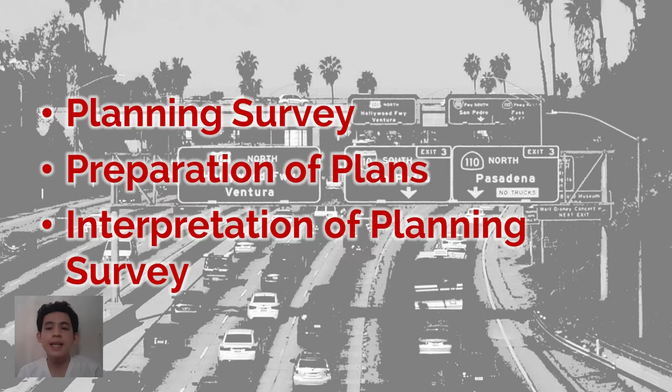Hello everyone, my name is Matthew Havana and we're going to talk about planning survey, preparation of plans, and interpretation of planning surveys. But before anything else, let me share with you this very famous quote by Benjamin Franklin. It says, "If you fail to plan, you are planning to fail." This quote really emphasizes the importance of planning because if you will not formulate a plan, you are more likely

to fail. So na-observe nyo, the most common time frame in highway planning is 5 years. Kasi by creating a 5-year plan, mas na-increase mo yung chances of success in reaching your goals. But also, meron pa ring annual plans just to show progress of the plan each year. Sa 10-year plan naman, it is too long and a lot of things may change in that span of years.

And now let's proceed to planning survey. Highway planning phase includes assessment of road length requirements for an area and preparation of master plan showing the phasing of plan in annual and 5-year plans.

So share ko lang, dito sa municipality namin, the local government unit already gave a notice to us, especially because we are situated beside a national highway, about the plan of widening the road. And also, nag-travel kami dun sa Bislig City last Sunday. Na-observe ko, nakita ko yung mga roads dun is all widened. So, what do you think are considered before conducting these projects? It

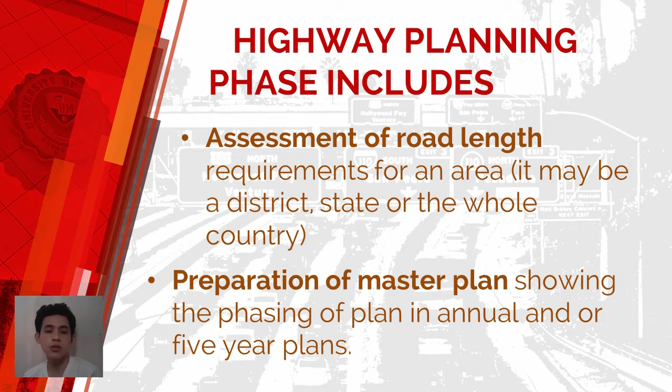obviously involves planning. So, highway planning involves the assessment of the length of road required for a given area, which may be a city, district, state, or a country. It also includes the preparation of master plan for the area taking into consideration future needs and phasing the program in annual or 5-year plans based on the priorities and utility.

For assessing the required road length for the area, field studies are to be carried out to collect the necessary data. These are economic studies, financial studies, traffic or road use studies, and engineering studies. Napakahalaga talaga magkaroon ka ng knowledge about the area where you conduct the project by planning survey with the help of these 4 studies. So, una is the economic studies.

In economic studies, details of the existing facilities, their utility, distribution of the existing population in the area, population growth trends, existing products in agricultural and industrial sectors, future trends of development in these sectors, existing communication and education facilities, and the per capita income are to be collected.

Economic growth has received the strongest priority in all the plans because these roads are good for the flow of our economy and for faster transport of goods. Government will not spend on things that will not profit them, of course. That's why they are more invested in the roads that connect to the center of economy like cities rather than roads in remote areas. So next is financial studies.

In financial studies, various financial aspects such as the sources of funding, estimated revenue from taxes on vehicles, indirect benefits of raising the living standards of the people due to the proposed road network, resources at local level, toll taxes, vehicles, and fines, and the future trends in financial aspects are considered.

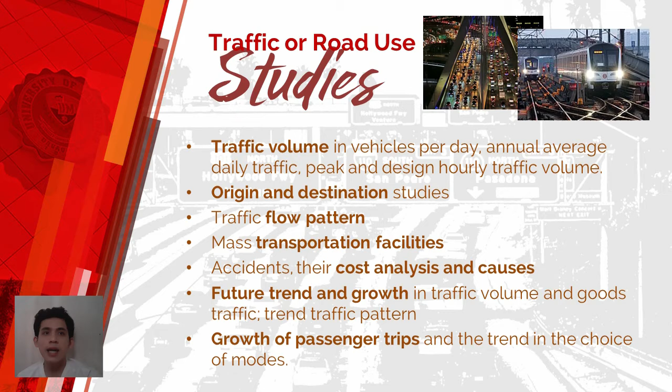So every local government unit considers the faster transportation of goods and other products. That's why, as you can see, they constructed diversion roads for delivery trucks and other vehicles to avoid traffic. Dito naman sa municipality namin, we have an ongoing construction of diversion road. It is mainly for large heavy vehicles and also for travelers to have a faster road.

And lastly, engineering studies. This includes study of the topography, soil, location and classification of existing roads, estimation of possible developments, road life, traffic studies, origin and destination studies, and special problems, if any, relating to construction, drainage, and maintenance. In this study, we are applying the sciences of engineering, yung mga pinag-aralan natin like surveying, soil mechanics, engineering economy, and highway engineering.

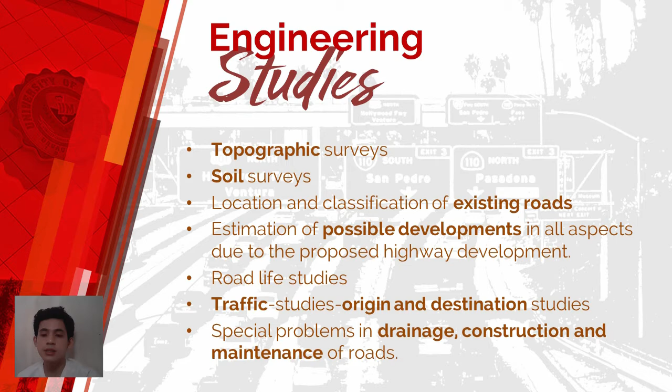We can determine the economical route, estimate the materials and process to be used in construction, and the life expectancy of your road. That's all for planning survey. Remember those 4 studies to be considered: economic studies, financial studies, traffic or road use studies, and engineering studies.

And now let's proceed to preparation of plans. The planning surveys you've conducted based on those 4 studies should be presented in the form of plans, but is conducted before the finalization of alignment and other details of the road development. There are 4 drawings usually prepared showing the various details of the area, and let's see the differences.

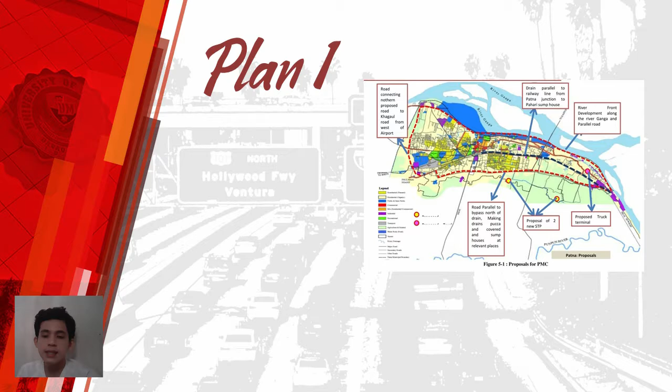First is Plan 1. It is the general area plan showing almost all existing details, namely topography, existing road network and drainage structure, rivers, canals, nullahs, etc. Towns and villages with population, commercial, industrial, or agricultural activities are also shown on this map.

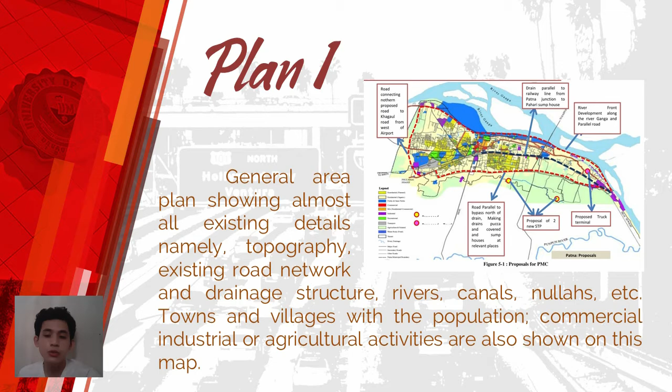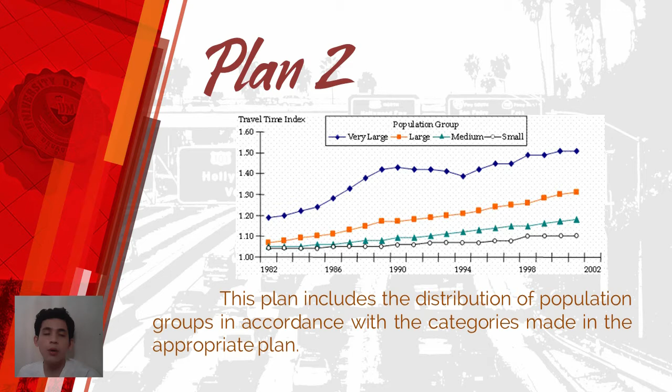Next is Plan 2. This plan includes the distribution of population groups in accordance with the categories made in the appropriate plan. Next is Plan 3. This plan shows the location of places with their respective quantities of productivity.

Lastly, the Plan 4. This plan shows the existing road network with traffic flows and desire lines obtained from origin and destination studies of traffic. Proposals received from different sources may also be shown in this plan.

Now that being said, all these types of planning, not only in engineering but also in other fields, it is imperative to follow thoroughly and fundamentally the step-by-step plan before jumping to others. So this is created with a purpose to succeed.

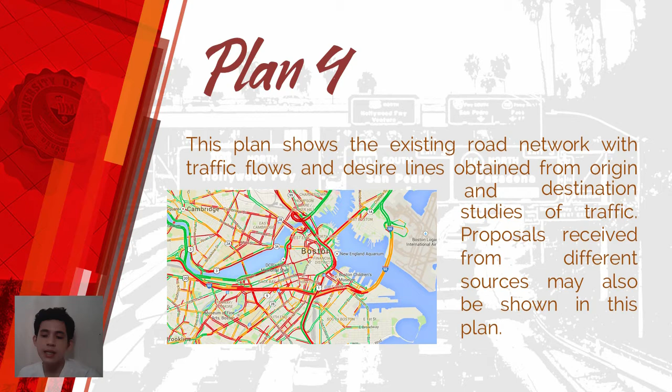So for our last topic, we will discuss interpretation of planning surveys. After conducting planning surveys and preparation of plans, it is useless if you do not understand the details you've gathered. The various details collected from the planning surveys and presented in the form of plans should be interpreted in a scientific way before arriving at the final road development program. The data collected could be interpreted and used for the following important uses.

First is to arrive at the road network out of the several alternate possible systems which has the maximum utility. Next is to fix a priority of the construction projects so as to phase the road development plan of an area in different periods of time, such as 5 years plans and annual plans. As you can see, there is really a need to know the priorities. Maybe there are other projects that have more weight in terms of importance.

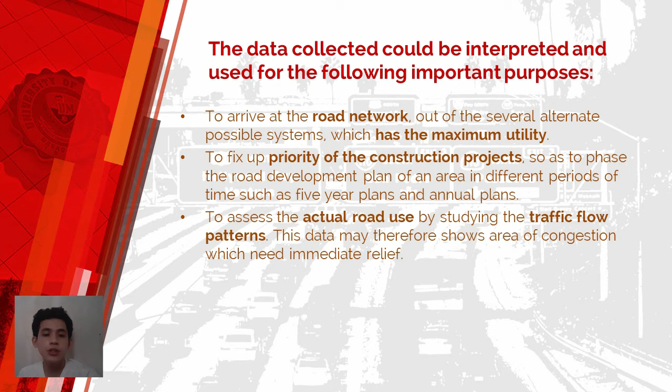Next is to assess the actual road use by using the traffic flow patterns. This data may therefore show areas of congestion which need immediate relief. So if there is a need of widening or constructing a diversion road, so dito.

Next is based on the traffic type and intensity, and the performance of existing types of pavement and cross drainage structure. A new structure may be designed using the data and the past experience.

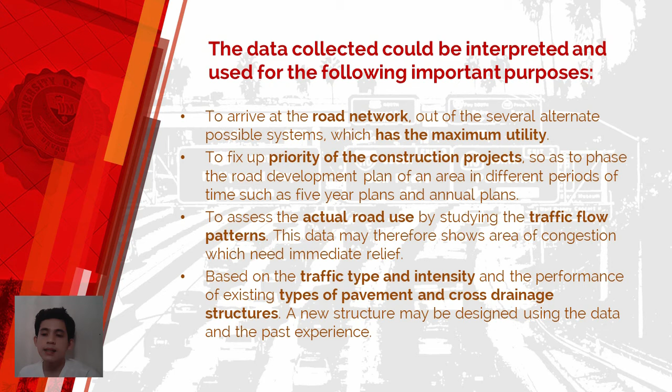The fifth one is comparison of the areas may be obtained on the basis of their economic activities. This information may therefore suggest the areas of immediate need for road network. As what I've said earlier, economic growth has the strongest priority in constructing a road.

Lastly, on statistical basis, the data obtained in fact-finding surveys may be analyzed for the future trends in development of an area. For example, growth in productivity and population, which in turn generate higher traffic volume. This information may be useful in the future planning.

So plans are meant for future activities, so let us foresee the picture of how developed the area will be for the next 5 years, because if you will not prepare the roads for the development, ma-interrupt yung development ng isang place. So that's why you will also consider the next more years, because the development will not stop only for 5 years. So you will consider also the following years. The development of a city or town is also dependent on the roads it has, so they must go together.

So that's all for today. I hope you've learned something from our discussion. Let us remember those things to consider before constructing a road.